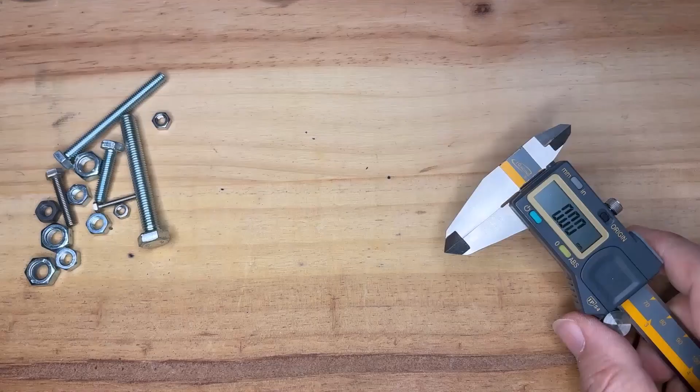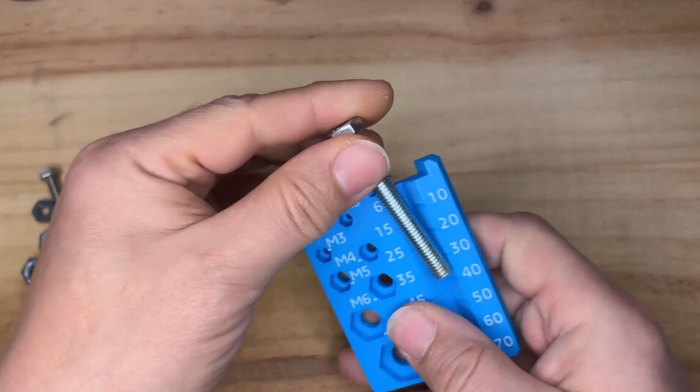Hello everyone! If you're tired of measuring screws, bolts and nuts just to store them and reuse them after a project, this video will show you how to create a 3D printable screw sorter that lets you instantly identify diameter and length, with an additional option depending on whether you have a multicolor printer or not.

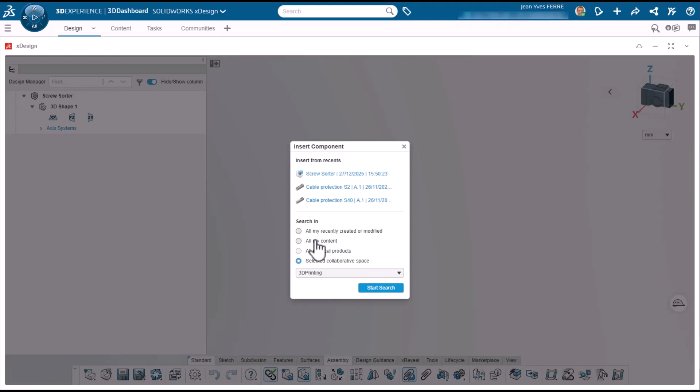To do this, we will use SOLIDWORKS xDesign, a browser-based CAD software that requires no installation. Here I click on Create to start a new project and I am ready to design. At this point I do not even need to decide whether to start with a part or an assembly, because in xDesign it is the same object.

What I don't know yet is the size of my part, so I open an M10 by 70mm bolt to get a rough idea. I will use this part to size my first block. I move it using these simple handles, translations and rotations, and then start my first sketch.

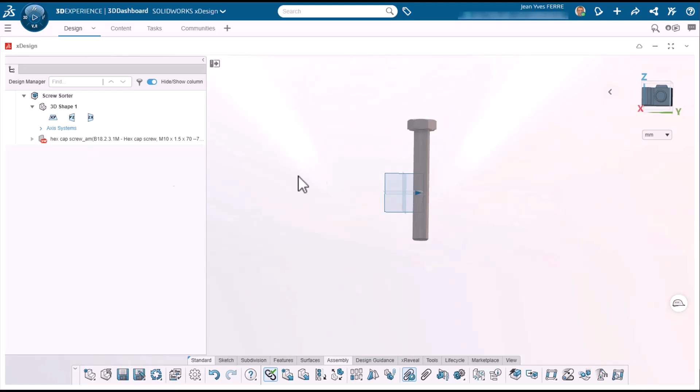Now that I have a rough idea of the required dimensions, I draw a rectangle around the bolt. If I need to increase the size later, I can change the dimensions at any time. The same logic applies to the block depth, which I set to 10mm.

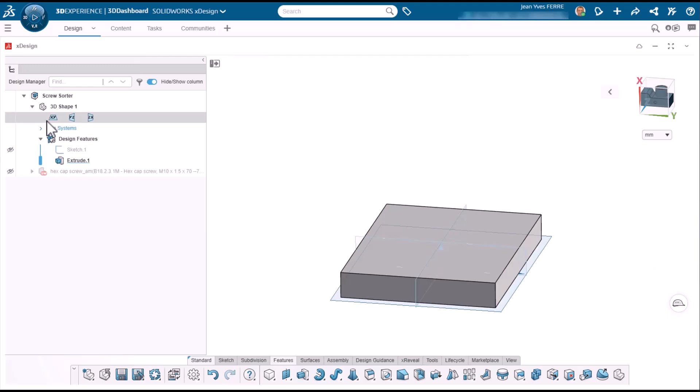Next, I want to create a groove to center the bolt. For that, I create a V-shaped sketch, and as you can see, I leverage relations to define it. This dimension appears in gray, which means it is not required. Once I add the 10mm dimension to the border, the sketch becomes fully defined and turns black.

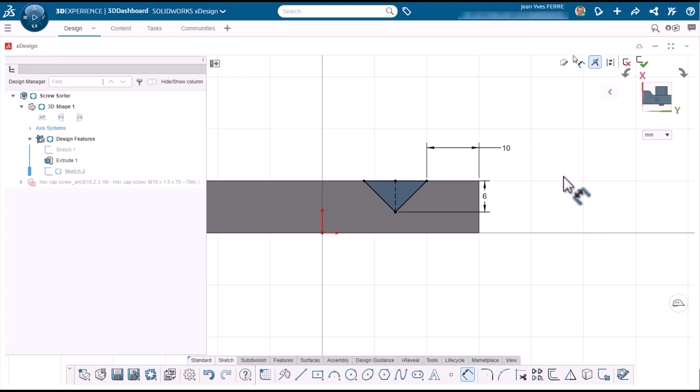I then add a cut feature with a through-all end condition. This ensures that even if I change the part size in the future, the cut will always go through. This is called design intent, and xDesign helps enforce it at every step of the design.

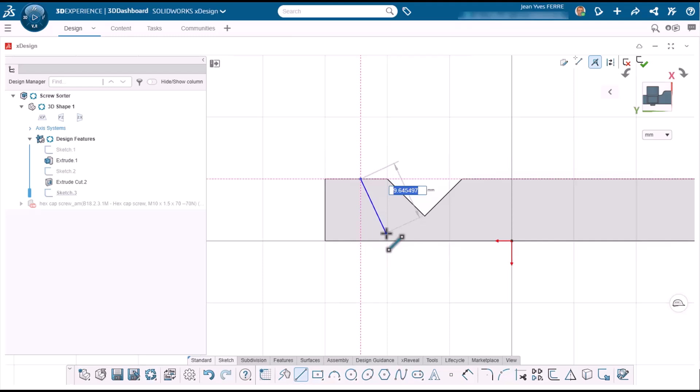Now I want to add another cut so the bolt head is fully contained while measuring. This will also define the starting point of the measurement.

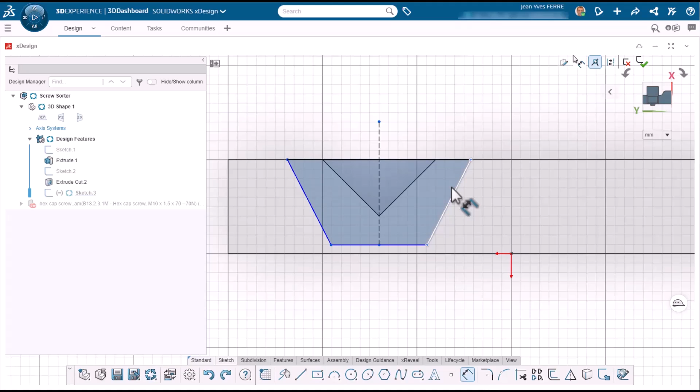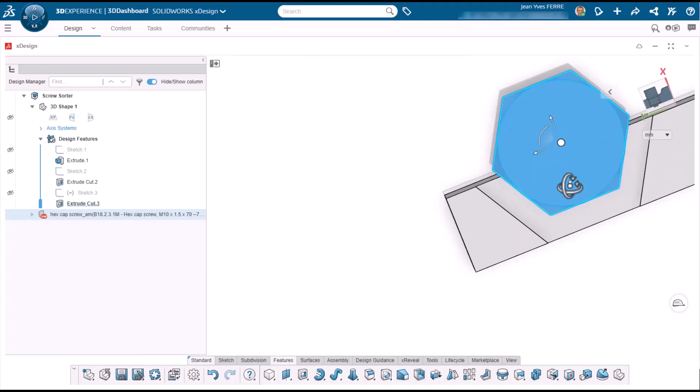This cut is a half hexagon, and once again I use relations to minimize the number of dimensions. With just one angle and one width, everything becomes fully defined, making future changes much easier. I then use the sketch to cut the part. I quickly check the head size using my M10 bolt, and I continue designing.

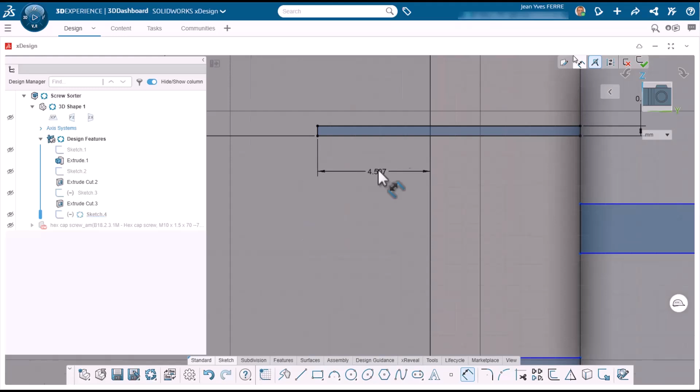Now comes the big part, graduations. For this, I need several rectangles positioned at precise locations. I decide to place tens on the right and numbers ending in 5 on the left, except for the first one at 6mm, which is more common in practice. I start with 3 rectangles for 6, 10 and 15, and I will pattern the 10 and 15 every 10mm.

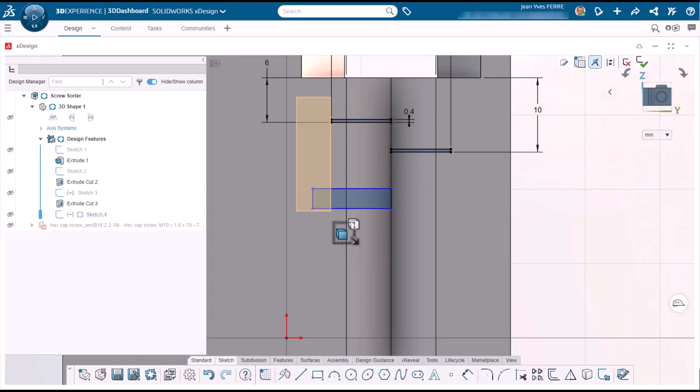Once again, I rely heavily on relations, equal, align and coincident, to simplify dimensioning. I simply select 2 entities and choose from the relations proposed by xDesign. If the proposed relations look strange, it usually means I made a selection mistake. That part is very straightforward.

Now I create the pattern. I select a rectangle, drag the handle in the correct direction, and define the number of instances. Here I also choose to add dimensions to the patterned entities, so everything remains fully defined.

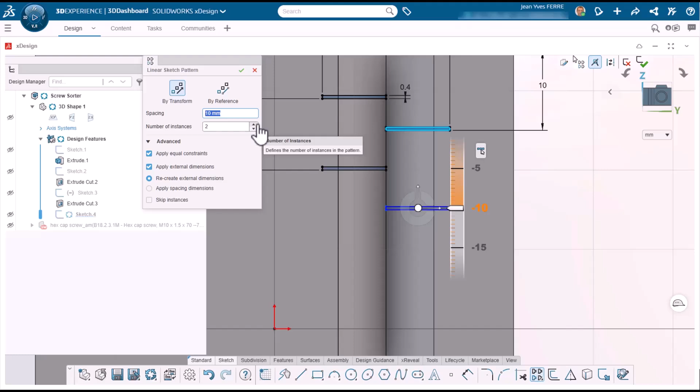Once the dimensions are sorted, please don't judge me, I repeat the same process on the other side. I finish with an align relation for all middle edges and my sketch is now complete.

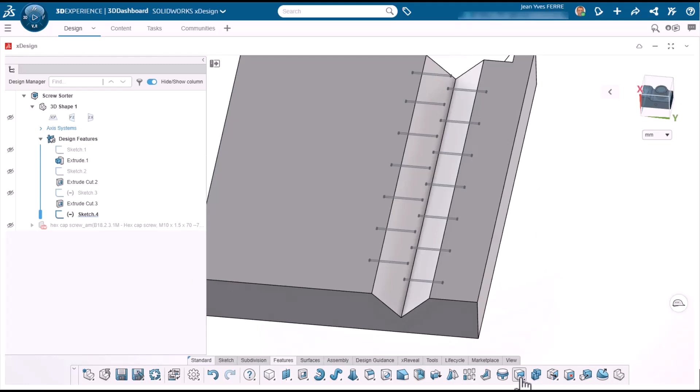I use this sketch to split the faces into smaller ones, which will allow me to remove material and create the graduations. To do this, I window select all rectangles and then remove the selections I don't need. With so many small rectangles, this is clearly the fastest method.

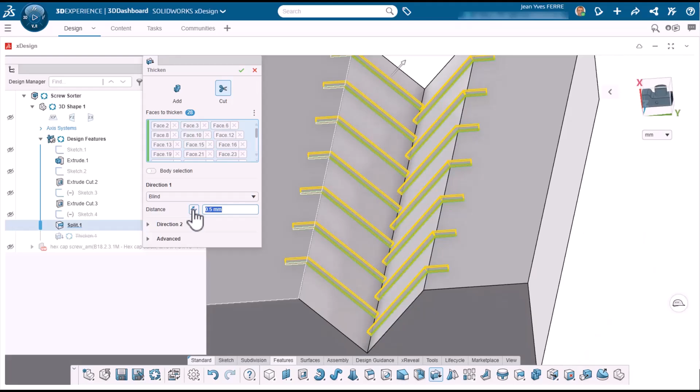I then remove material by 0.5mm, making sure the direction is correct. Now it looks good and I can move on to the numbers.

This part is very easy. I simply use the text feature and define an anchor point. It only takes time because I want to add all the numbers.

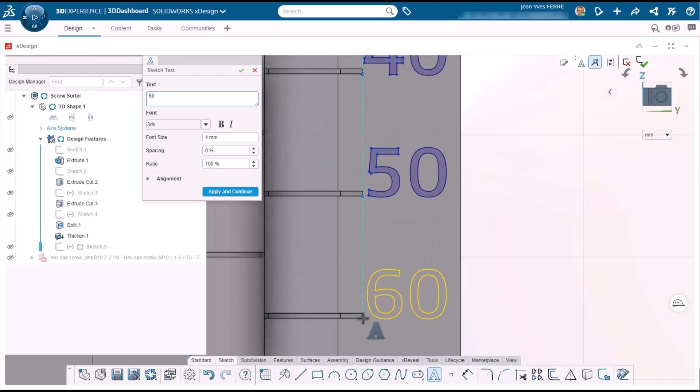For the other side, I just change the text direction so the anchor point is on the right, and I repeat the exact same process with the corresponding numbers. I then extrude the numbers, not too much though. 0.6 mm is more than enough.

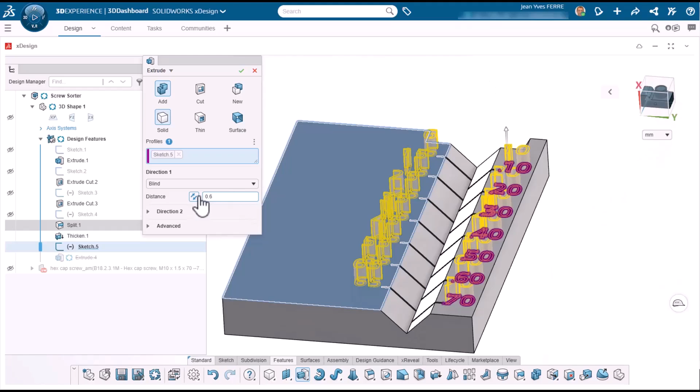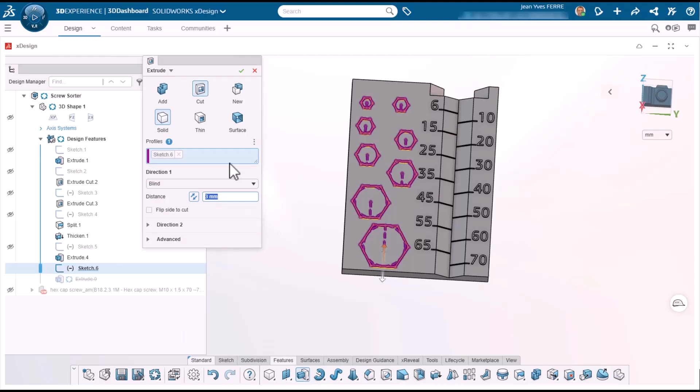Next I move to the left side of the part, where I will measure nuts. For this I create hexagonal shapes. If you have watched my other videos, you already know that we need some additional clearance, 0.2 mm, to avoid nut jamming. Feel free to check those videos if you haven't already. Using my mechanical handbook, I add 0.2 mm to standard nut sizes and create a cut that is half the depth of the part, so 5 mm.

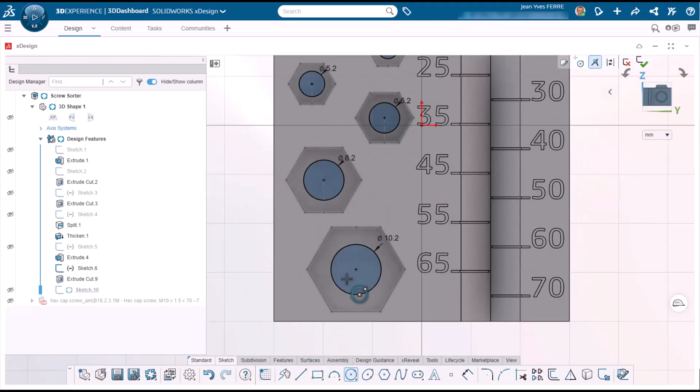I then show the previous sketch to reuse the hexagons and create circular holes to measure bolt diameters. Of course, I also add clearance here, 0.1 mm for small diameters and 0.2 mm for the larger ones. I finish with the through-hole cut.

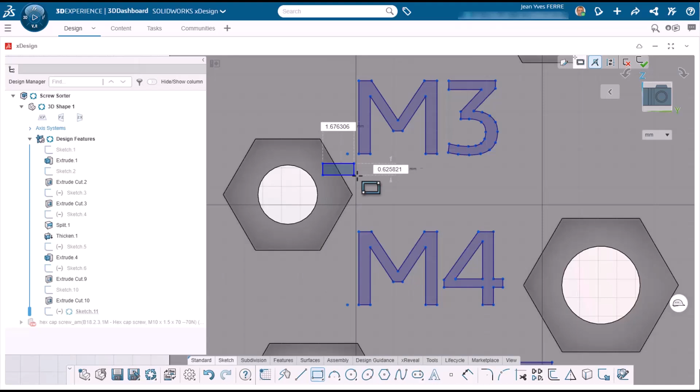Now I need to add text to identify the nut sizes. I follow the same method as before and add sketch text. I also add a small line to clearly indicate which text corresponds to which hole. This avoids any confusion. To do this, I use the hole edge and apply xDesign's smart trimming tool to remove the excess. If I don't do this, I won't be able to insert the nuts into the holes, and that would be bad.

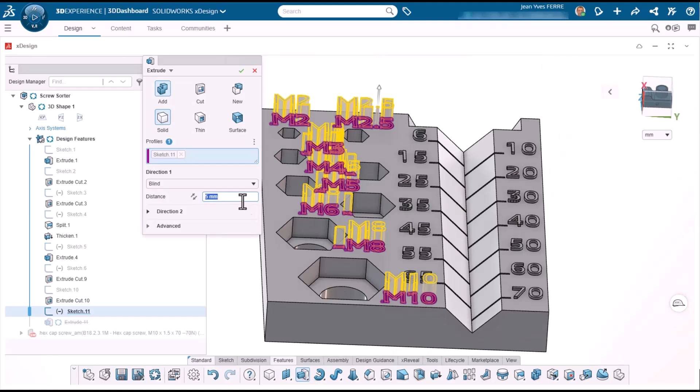Once again, I extrude the text by 0.6 mm and it's done. I would now like to add a magnet to keep the bolts in place, so I measure one that I already have.

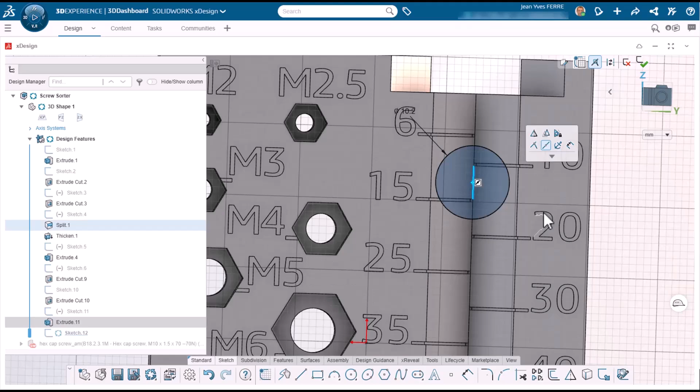I create a small hole with some extra clearance and center it along this line. This way, any bolt, even small ones, will stay in place during measurement. After adding the hole and a small chamfer, I apply additional chamfers to improve the overall look of the part.

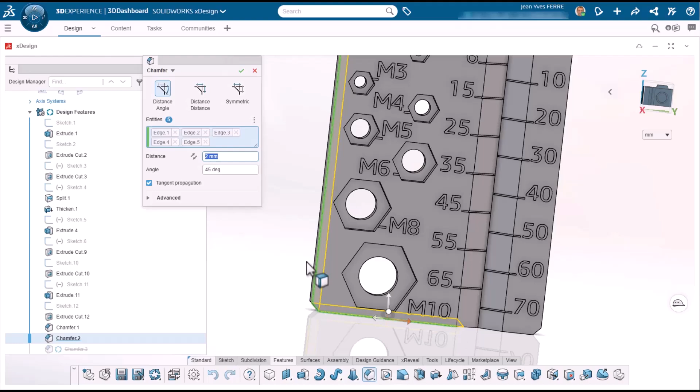Notice how I can use the xDesign Edge Assistant to select all corners with a single click. If I'm not satisfied with the preview, I can always select edges manually. Both methods work perfectly. The part is now finished and I can move on to the second phase, 3D printing.

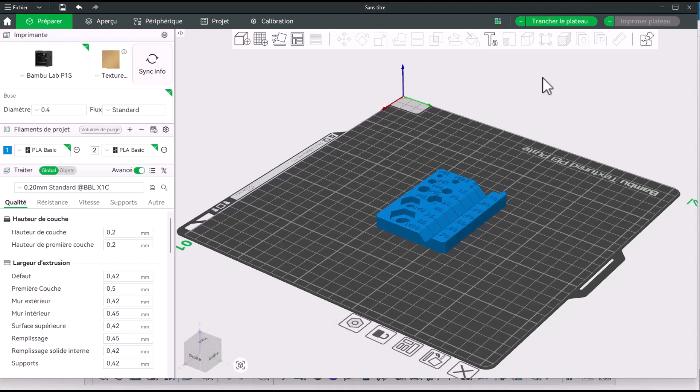xDesign includes a dedicated feature for this, where I can choose the orientation and verify that the part fits within my printer's build volume. It then generates the correct STL file, ready to be opened in my slicer, the 3D printer software. In my case, I choose a height where the color will change automatically.

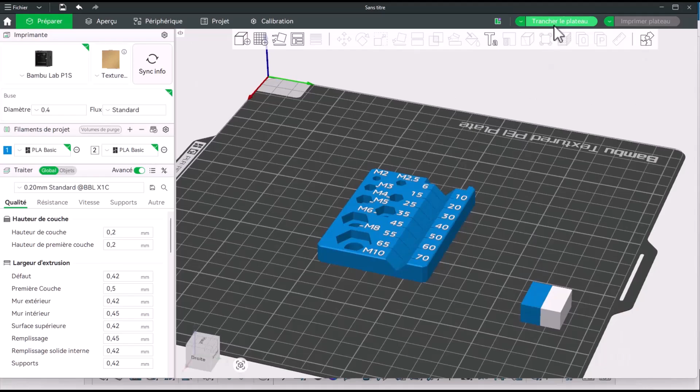Later, I will show how to achieve the same result with a single color 3D printer. Once sliced, I simply send the job to the printer. Now this is printing time.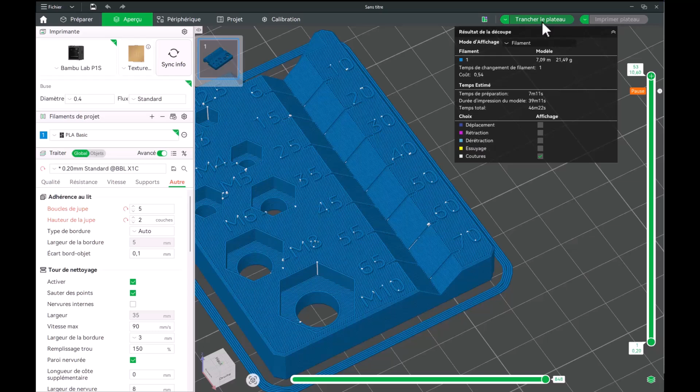If you don't have access to a multicolor 3D printer, you can still add a pause in the printing program to change filament just for the text, as shown on screen. You simply choose the layer where the print stops, and the machine will pause so you can switch filament and resume printing. You can also print everything in one color and paint the text afterward.

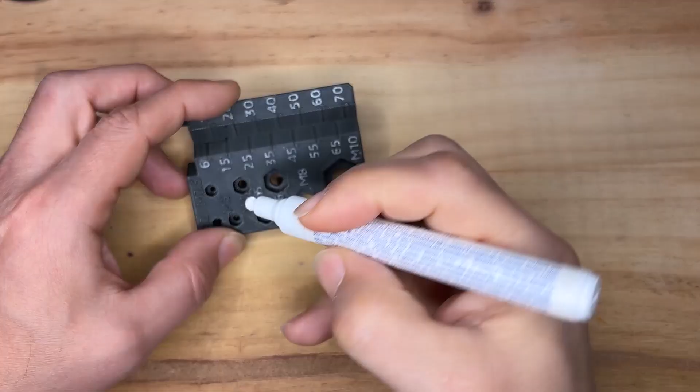Here I used a white marker, but model paint works probably better. Once the ink smudge has been removed, I recommend sealing everything with a coat of varnish.

I can now install the magnet, and as you can see, it fits perfectly. The bolt stays in place, no glue required, which I personally prefer.

Now I can measure this M10 by 60 bolt in seconds, sort this M6 nut, and this M3 by 20 bolt, just as easily.